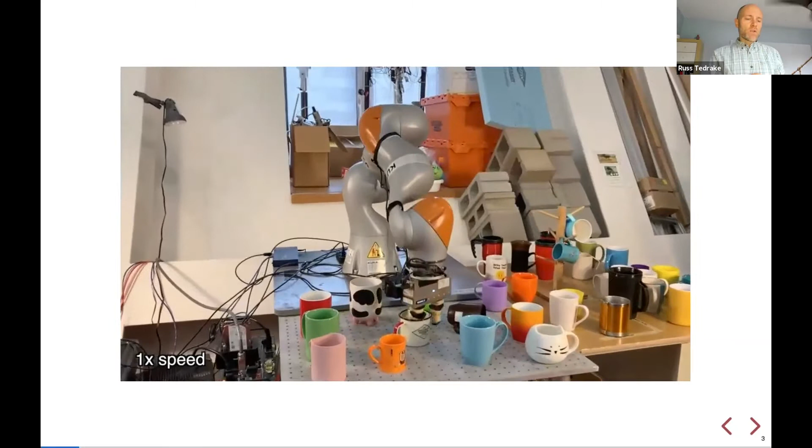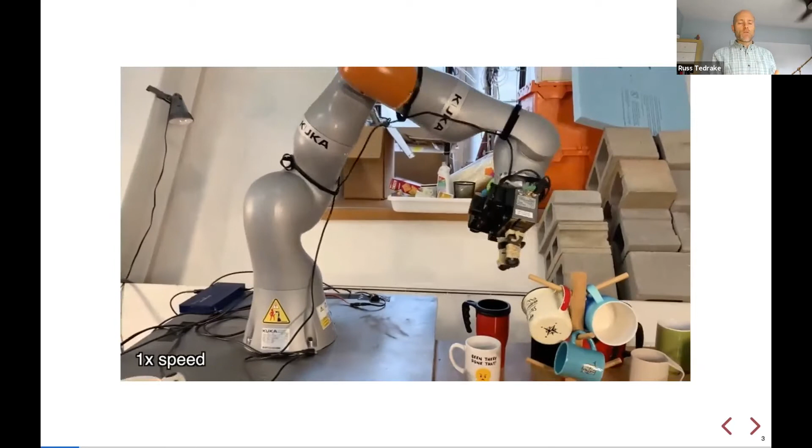And I'm not going to get all the way back to onions today, although we have some work on that that will be presented at WAFR. But I want to start talking about the problem, at least at this sort of sweet spot we found, which is the same one Sonia identified, of trying to manipulate at least classes of objects. Let's keep them rigid for now to start, although we'll show you some non-rigid things. But I'd like to at least have a representation to start that would work equally well for all of the objects across a class. That already breaks my thinking as a control theorist in some sense.

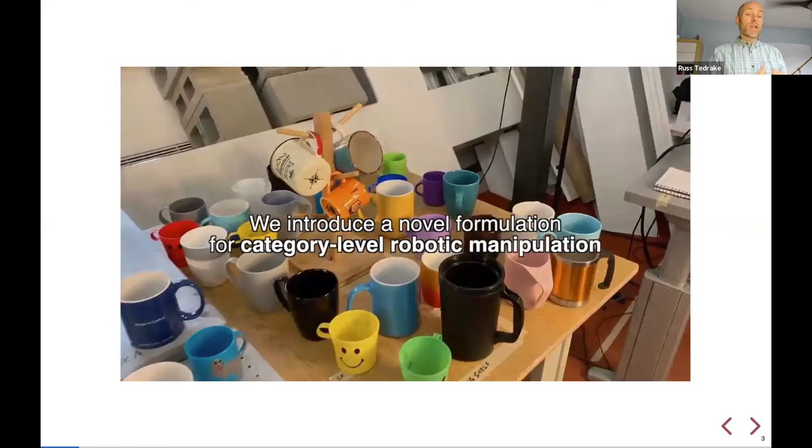But it turns out there's a couple of pretty simple ideas that go a pretty long way in terms of scaling to this level of task. So one of those is this idea of key point affordances. And that's work with Lucas and Wei, who will give a follow-up of this as one of the spotlight presentations this afternoon, and Pete.

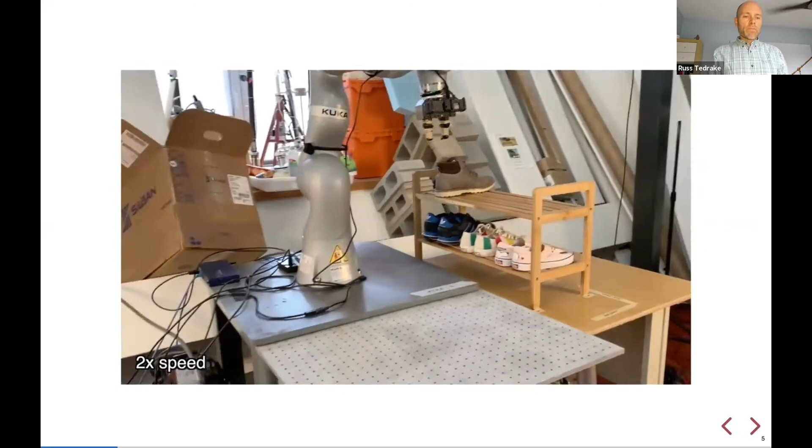Okay, so the idea here again is to do something where you're given an entire category of possible objects, shoes in this case, and you'd like to do something that involves some level of precise manipulation. It's not just pick it up and drop it in the bin, but somehow it matters that the toe goes forward on that rack and the heel goes in the back. And we'd like to be able to even talk about what does it mean to define a geometric task on a category of objects.

Okay, so here's the basic problem statement. We'd like to manipulate potentially unknown, but we'll keep it rigid to start with, objects from a category, mugs and shoes will be some favorite examples that we use, into desired target configurations to be defined in terms of our new state representation here. And now the straw man is to just try to define the pose in 6 degrees of freedom, 7 numbers, let's say, pose for the objects. That seems like what we tend to do if we're manipulating known objects with CAD models.

But it turns out you don't have to think too long to realize that it's actually very hard to come up with a canonical pose over a rich category of objects, a whole rich class of objects. So even the notion of what is the heel, what is the toe, these things are consistent, but the notion of where is the center, or what is up, can vary widely, especially if there are kinematic constraints on those things.

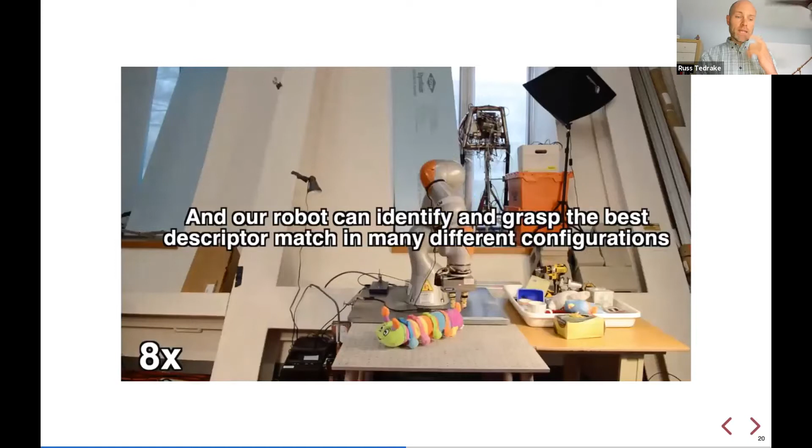But if we don't have that semantics, then how do we specify the task, right? At the original time, we could already have a simple interface, which is that we'll just click once on the image, we'll do the correspondence, we'll use the local point cloud, and we can do basically a context-aware pick. And that was a good start, but we want more than that. We wanted to go to more dynamic tasks for sure.

So the next paper I'll talk about here a little bit is dense object nets applied to visuomotor imitation learning. Basically the imitations are providing the task that we had trouble specifying without the semantics. So to set this up,

we looked at a lot of the good work on visuomotor policies, and when you watch them it's very compelling that they're using feedback in a way that most of our robots aren't. They aren't sense, then plan, then move and making big mistakes. They're making very reactive motions based on the camera's input. And so we looked more carefully at how those systems were being architected.

And a big feature emerged, which is that people normally have a very big perception network, with this O image going in that maps into a relatively small set of features, the feature vector Z. And then we pass in, for instance, the robot's configuration also, and then a relatively small network that actually is doing the policy. And there's a bunch of ways people have pre-trained that image network.

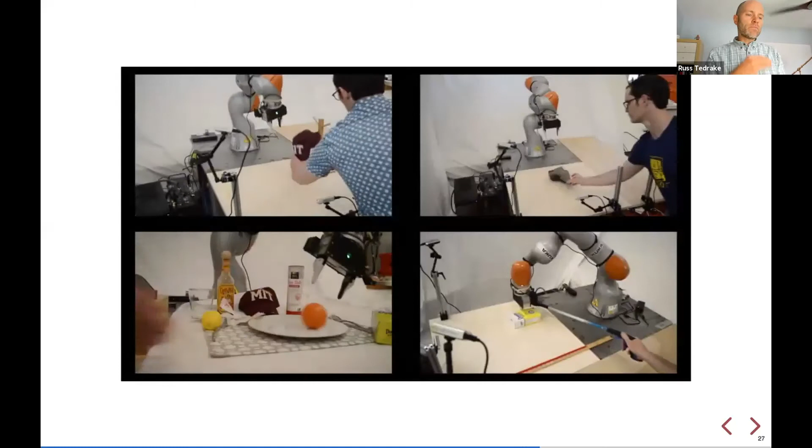But what really got me was how well it worked in reality. So for pretty non-trivial tasks, including deformable objects and the like, not only could it accomplish the task, but it had that feel of robustness. Let me show you a couple of my favorite examples here. So this is just grabbing a plate, okay? This is sort of the basic example that was teleoped.

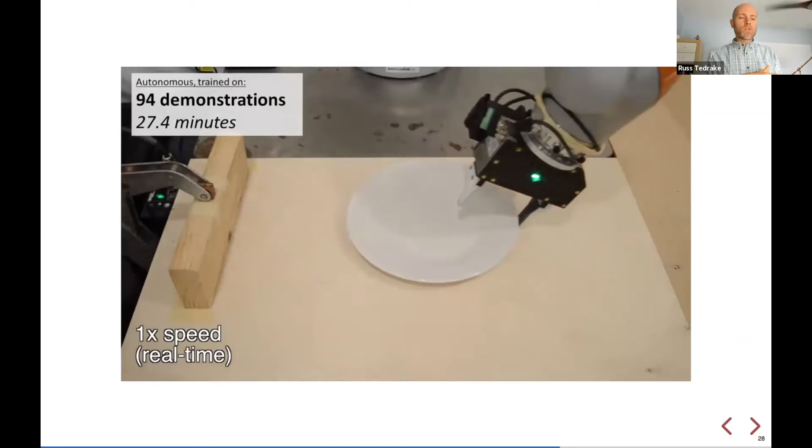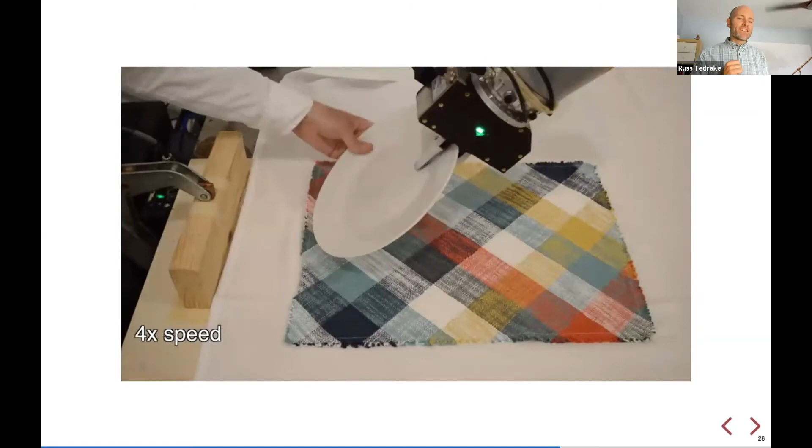The dense descriptors are pre-trained separately; we separate the dense descriptor training from the actual imitation learning. But that gave us a robust enough representation with those correspondences to find the key points that once we did a handful of imitations, we could apply it in a variety of visual scenes and get surprisingly impressive robustness. You can see all the different things that it's experiencing here that were absolutely not in the imitation data, and it just worked incredibly well.

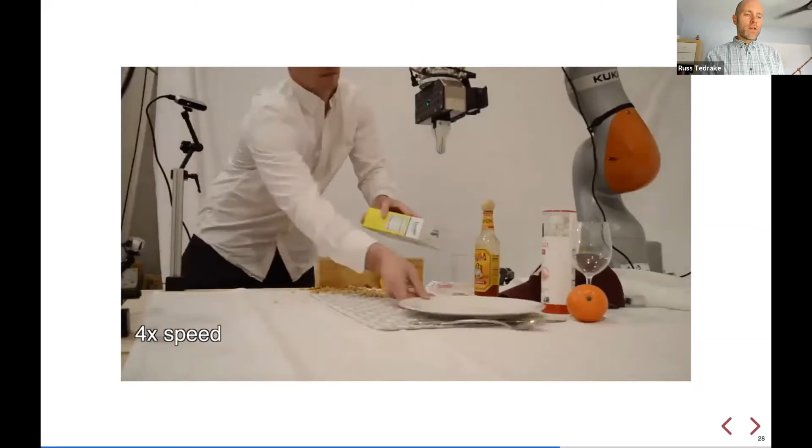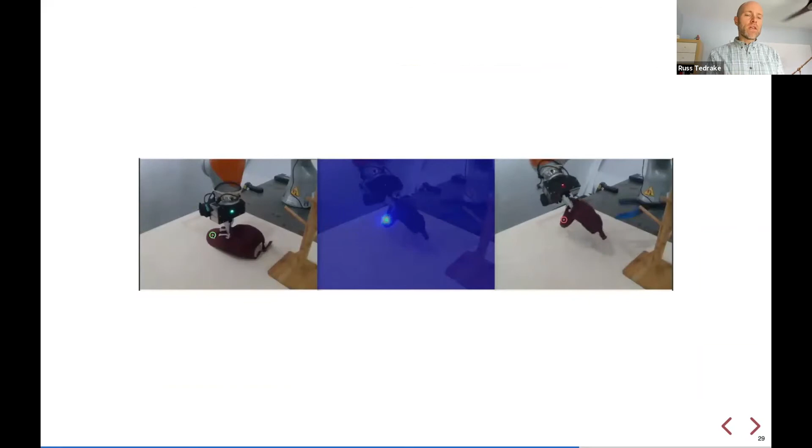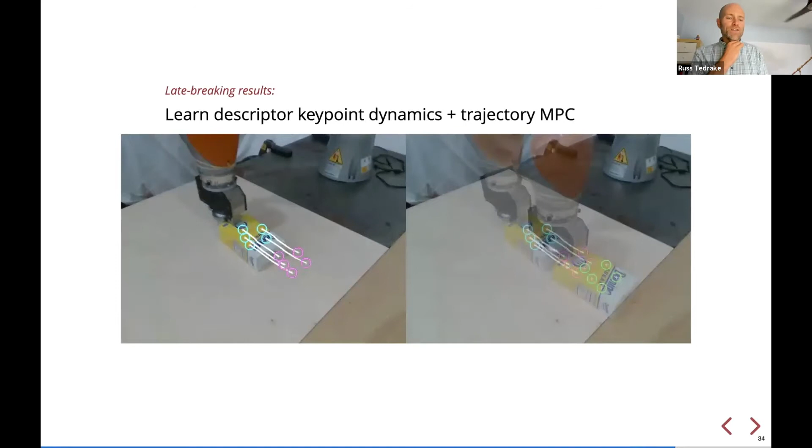So the last piece I'll just mention quickly here is trying to take the last step with that idea and see if we can do the same thing, but with a lot less demonstrations and with more generalization. And so now the most recent results are on dense object nets for model-based control. And these are late breaking results. I think the video came in last night, but Lucas is back in the lab. He's had the technology ready, but he needed to get back in the lab to do the last few experiments.

And now we're taking the dense descriptor key points, learning a forward dynamics model, another network, to basically learn the forward model in the key point dynamics space, okay? And then now we have a deep network forward dynamics model, and can we do trajectory-based planning through that model? And I'll just show that again. So this is sort of what it looks like.

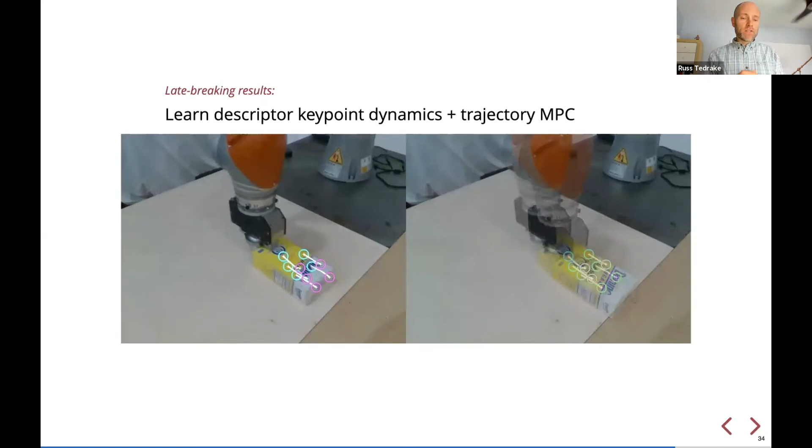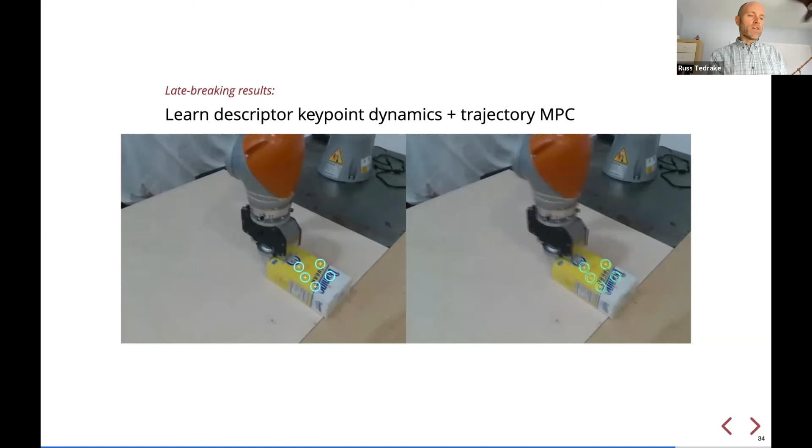It's done in model predictive control with a receding horizon when you get to the end. You specify the target in terms of key points at the end. In this example, he's actually giving a single demonstration to seed the optimization and give it targets along the way. And then it's planning how to control that box in order to get it there. And it does pretty non-trivial things in terms of stabilization; it gives the same look of robust performance, but this time you give me a new task in the form of a single demonstration, and there's no extra demonstrations required.

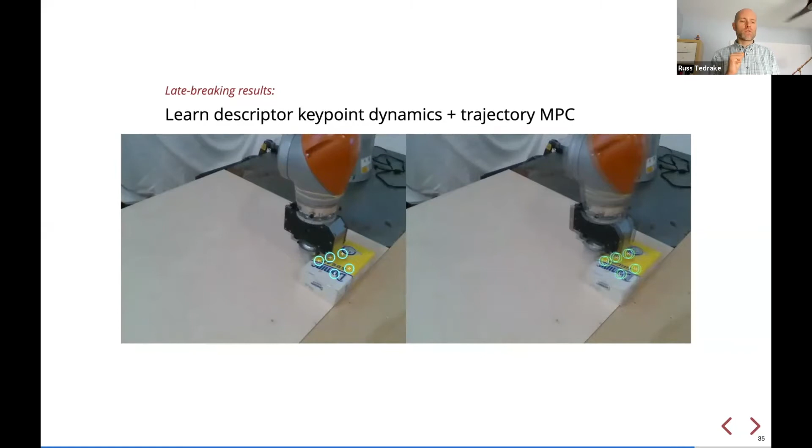So Lucas is finishing this up lickety split, and he's giving his defense next Monday. And so you should check it out either live, if you send Lucas a nice email he'll give you the Zoom link, or you could watch on YouTube right after, but he's going to give a great defense next Monday.

Okay, so what I continue to want is state representations in general, but certainly to start, I'm already happy with trying to do dexterous things with a category of nearly rigid objects, or where the deformability of the objects didn't impede the complexity of the task too much. And this is what I've tried to present here. So we have key points as a very simple representation of the category level geometry, but we combine it with local sensing and dense reconstruction in order to get the full representation we need.

And now we're trying to say if it's more than geometry, if we can actually learn the dynamics, how far we get with dynamics. I mean, the rough takeaway is that the dynamics prediction works very well in a variety of tasks. But honestly, once you've got a model in the form of a deep neural network, planning in that model is still hard, maybe harder than people fully admit.

For task specification, we talked a little bit about annotated key points, human labeled key points with semantics. That gives the semantics of the task. That's a beautiful way to describe the task. But with the self-supervised descriptors, we just use demonstrations to say what we want.